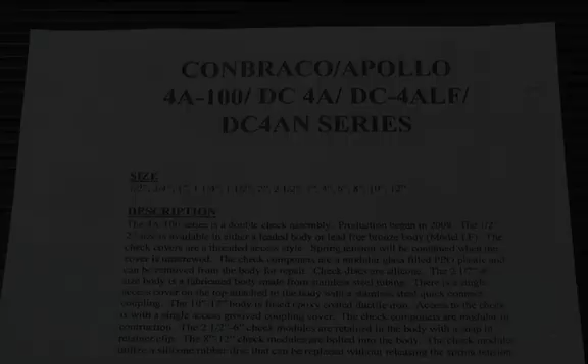The next series we're going to see from Conbraco is the 4A series of backflow prevention assemblies.

Conbraco has had a name adjustment, if you will. You may see the name Conbraco, which is the parent company's name, or you may see the name Apollo used as a model number on the backflow assemblies. So Conbraco, which was Consolidated Brass Company, is the parent company, and Apollo is a model under the Conbraco name. So if you see both names, don't let it confuse you.

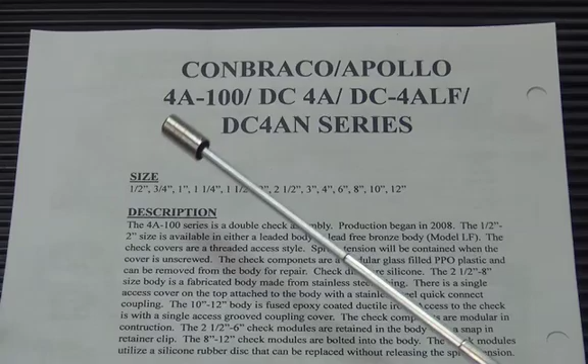The 4A series is their latest generation of assemblies. Like the previous generations, they utilize a two-digit designation. We saw the 40 series, we saw the 4D series, the 4S. Now we're seeing the 4A series, the 100 being double checks, the 4A-200 series being their reduced pressure assemblies, and 4A-500 being the PVB, same as the other model designations.

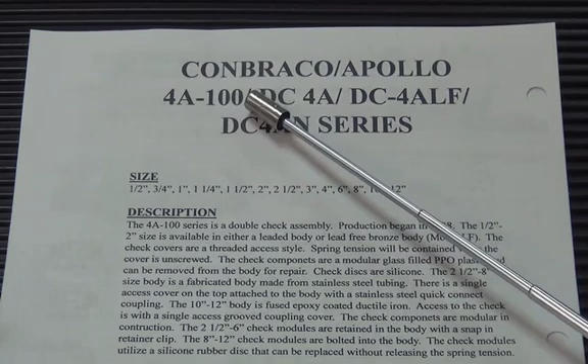The 4A series also has a designation where it utilizes the type of assembly, DC, with the 4A configuration. So you may see 4A-100, or you may see the DC 4A series. They're also producing it in a lead-free version in the small 2-inch and under assemblies. So you may see the 4A-100 series, the DC 4A, or DC 4A LF, as you see here. But they're all within the 4A-100 series of assemblies.

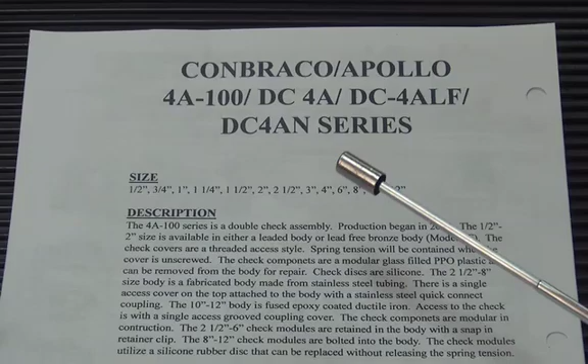They're going to be available in sizes 1/2 inch through 12 inch. The 1/2 through 2 will be the small sizes, available in either a leaded bronze or a lead-free bronze body. The 2.5 through 8 inch will be available in a stainless steel fabricated body, and the 10 and 12 inch will be available in a ductile iron body.

On the small sizes, 1/2 through 2, as I said, they're available in both lead-free and standard leaded bronze. They utilize a top entry configuration, with test cocks pointing up on the top. Screw covers open up the check assemblies and access a modularized check on the inside.

As you can see the breakdown here, here's what the modular check looks like. Here's the check in an exploded view. There's a spring retainer, a spring, a disc holder, the disc retainer screw, and the check seat. And the check seat is sealed into the body with an O-ring. It goes into the body like this.

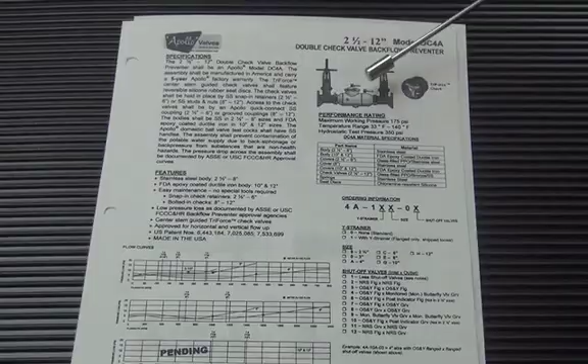On the larger sizes, 2.5 through 8, there will be a stainless steel body, fabricated, meaning that they weld pieces together to assemble the body. The 10 and 12 inch will be a ductile iron body, a standard poured material with a fused epoxy coating. The check modules will be modular in this design, similar to what we've seen in the 4D series.

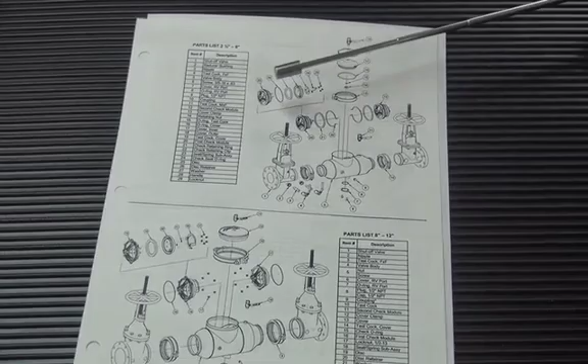They are a TriForce mechanism with a center guided check. Again, they're modular, so the check comes out in its complete working parts. And here's an exploded view of what the module looks like.

The end configurations will have a grooved end, so the gate valves will be a flanged by groove end. They'll also be available in grooved by grooved end if you so desire. But the body itself only comes in a grooved configuration.

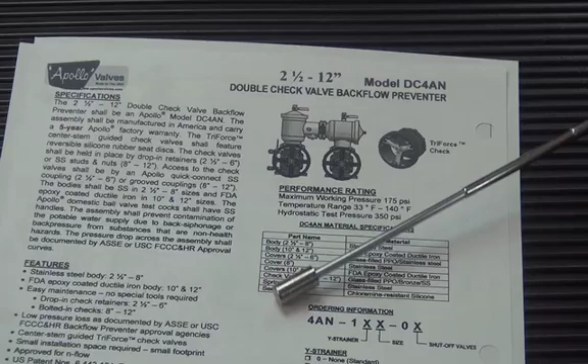They're also making an N pattern configuration, meaning the inlet comes up from the bottom, goes out horizontally, and back down in a vertical configuration. This is available for areas where you need a small footprint of the installation, where you want to install the assembly in a relatively small area.

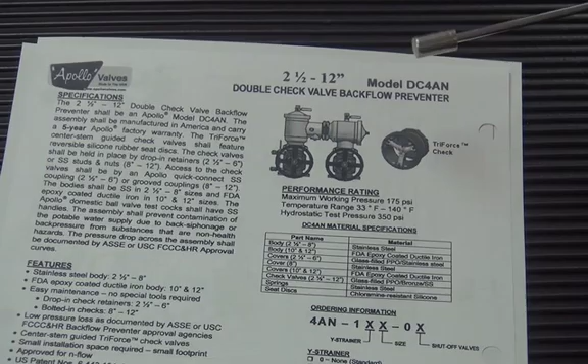Again, 2.5 through 8 will be available in stainless steel, and the 10 and 12 will be available in epoxy coated ductile iron. They will utilize the same check mechanisms as used in the horizontal pattern.

They also have available what are called valve setters. Valve setters for the N pattern configuration make for easy installation orientation, so that when you go to install this in the underground area, you can have L's that have a preset distance between them, so that the center to center matches up with the center of the backflow assembly. So all you do is cut your risers for the up and down between the adapters, and then lay your piping in the ground for an underground installation.

The series comes, as I say, in 2.5 through 12 inch sizes, and let's see what they look like inside.

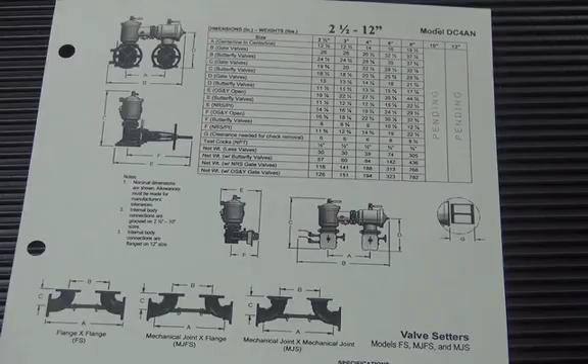The 4A series of double check, meaning the 4A-100 or DC 4A, as you may see both versions of it. This is the small, meaning 2-inch and under, assemblies that they're producing. They are available in either a leaded bronze assembly or lead-free bronze assembly for the main valve and the bypass and test cock units.

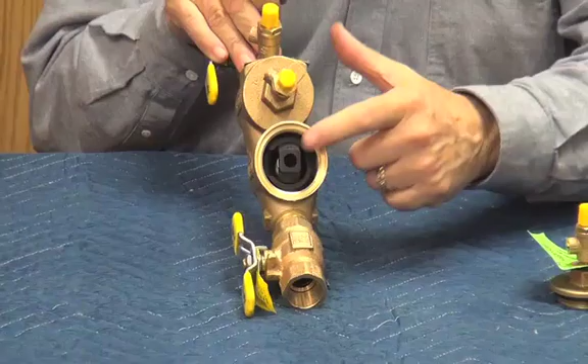Check covers thread on from the top. There is a hex head on the top of the cover for removing it. The spring is contained when you remove the cover, and there is a cover O-ring here. Once you take the cover off, what you will see is a spring retainer, which looks just like this. Here's a larger version of it, what you're looking at inside that check assembly.

For the average repair, you can push in on the spring retainer, rotate it 90 degrees. The spring retainer will come out, check spring, disc holder. The check seat, which is just pressed into the body at this point, can stay in the body for the average repair. The reason is this O-ring that sits inside the body here is sealing that seat inside the check body.

Anytime you do not have to release a spring load on an O-ring, it's not a bad idea. But you can repair it this way, or you can remove the entire check assembly, which is what this looks like, except this being a 2-inch version. Same story, that 90-degree rotation releases the spring tension, which allows the disc holder to come out. And here's where you can see the check seat cast into the plastic.

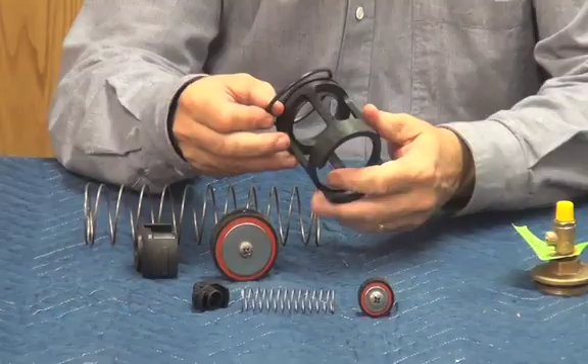There is an O-ring, as you see right here, that seals that O-ring to the body, so it's just pressed into the body and held in by the cover as it pushes on top. So you can either do it this way where the spring stays in there, or remove the check module.

Rebuilding it is a matter of one screw holding the silicone disc into the disc holder, replacing the disc. It's a symmetrical flat disc. Putting it back together is going to be just the reverse.

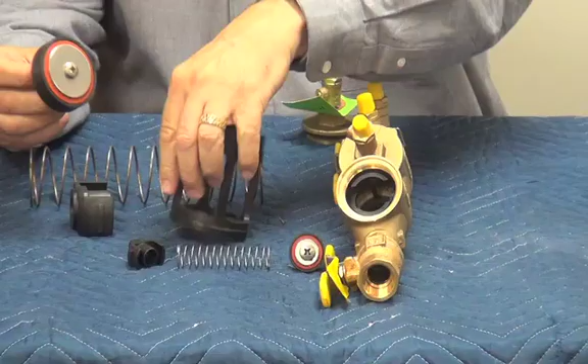Larger check assembly outside the body so you can kind of see it a little easier. It looks like this. Now there's one little thing you want to be aware of when you go to put this back together. This spring retainer, I'll take the spring out for a minute, pushes down here and rotates 90 degrees inside the body like this.

Now it's possible to have it rotate and not sit completely inside the body, because once it rotates 90 degrees, it actually lifts up a very small amount, as you can see right there. So to make sure it's all the way in, it has to rotate in and push up. Remember, the spring force is pushing up on it, so when it does go down, it will have a definite force, and you'll actually hear a clicking sound like that. See, that's where it's improperly applied. See where the spring retainer is slightly down, but rotating at full 90 degrees, it'll pop up just that little 1/8 of an inch, and you'll hear that clicking sound.

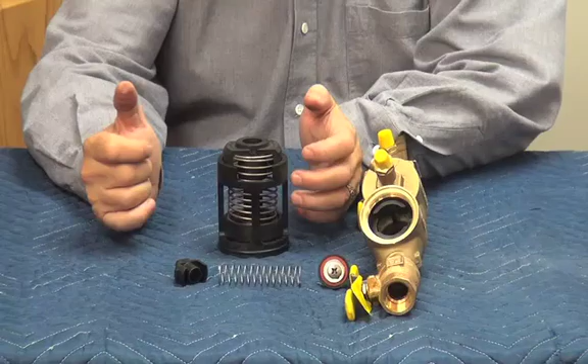Very, very important that that be in this position, because if it's like this, you're going to have some issues with the flow characteristics of the body. So the spring retainer must be in its full opening condition like that, so that it's all the way up. Listening for the clicking sound is a good idea.

Like all O-rings, it has to be properly lubricated. Yes, Conbraco provides a little pillow of grease for this. Proper application of grease is you put it on your fingers, wipe it all the way around the O-ring, and then place it on the check module. Don't put the O-ring on there and then wipe the grease on here, because that won't lubricate the O-ring properly. Proper lubrication of an O-ring, as we've said many times, is in your fingers, rotate all the way around 360 degrees so that it's lubricated properly all the way around.

If you did not remove the check assembly from the body, reassembling is going to look like this. Same story, we have to be very careful to make sure we have our spring retainer and want to hear that clicking sound as it pops into that area. The cover is also sealed by an O-ring, so we want to make sure the O-ring cover is properly lubricated also. Reassemble and tighten the covers back on.

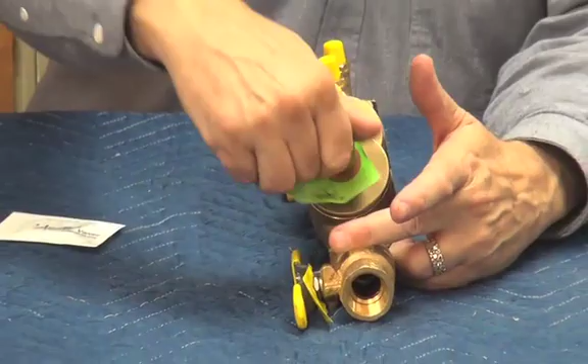Those are the check modules of the 4A100 series, 1/2 through 2 inch. The 4A series in the double check, meaning 4A-100, in the large sizes 2.5 through 12.

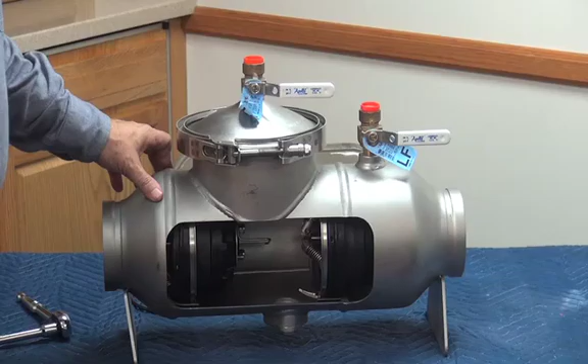The 2.5 through 8 is going to be a stainless steel body like we see here, but it's a fabricated body. Fabricated meaning we have pieces of stainless steel that they extrude into the shape and weld the pieces together to fabricate or construct the body. So by having a few pieces that are welded together, by the nature of welding, there's slight dimension changes that could happen along the weld.

You could have approximately a 1/16 to an 1/8 of an inch difference on a weld. So the end-to-end dimension, depending on how many welds are on the body and your size, could be off by that small dimension. So if you ever have to replace the body or you're putting it into an existing body, it's very important to check that end-to-end dimension.

On the 10 and 12 inch, it is a poured ductile iron material that's epoxy coated. And since it's a poured body, you'll have a standard dimension on the 10 and 12.

They're utilizing something new, this clamp that you see on the top, a quick connect clamp to have access to the check modules underneath. By utilizing a small 1/2 inch deep socket, it allows you to come in here and loosen this clamp. Once the clamp is loosened, you can compress it inward, sliding outward like this, and the clamp will come off in one piece.

In other words, this little hinge comes over here, so that holds on to there, and that's how that clamp operates from the top. It's sealed by an O-ring on the top.

The cover comes off next. And underneath the cover, you'll see the O-ring slot, and this is where the O-ring seals on that body right there.

The test cock on this is our number 3 test cock. Test cock 1 and 2 are going to be mounted on the inlet gate valve. Test cock 3 will be on the cover, and test cock 4 will be here. Test cock 4, you can see, is just a standard male thread going into the body. But test cock 3 has a bulkhead fitting that we've seen on some of the other versions inside the cover. So it's not just a standard test cock from that standpoint, but it operates on a bulkhead type configuration.

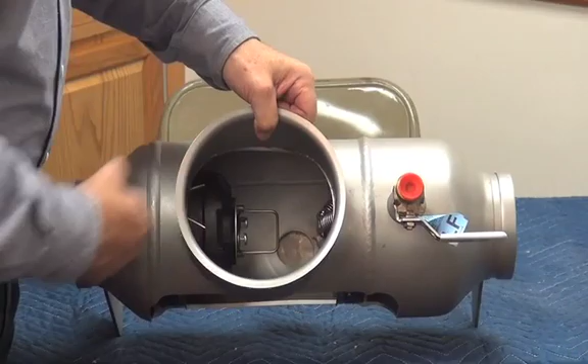To remove the checks, we're going to have to remove this clamp right here. And you can see the 2 little fingers protruding through the top. By entering and squeezing those, the clamp comes out from the top like this.

Next will come out a spacer, which is in there to add additional strength, and that's what holds the check assembly, with a small handle on the back side, allowing the check assembly to come out in one piece like this. So what you're seeing inside the body is this guide here, the spacer for strength, and the clamp that hooks into the body like that. So that's the check mechanism.

Clamp, spacer, and check assembly. So here's what the check assembly, the check module, looks like outside the body. As we saw in the body, it looked like this, as I said. The little handle on the back is to grip it to get it out of the body.

It's sealed by an O-ring, and here's where the O-ring sits inside that check module. That's what actually seals that check into the body.

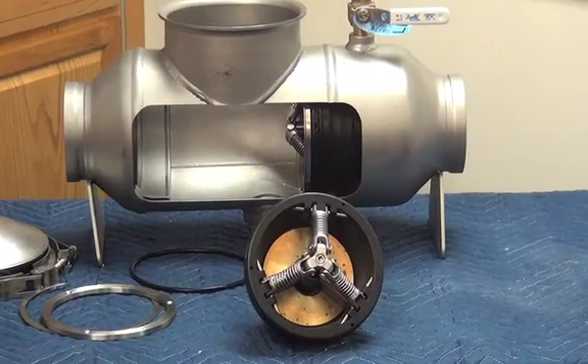Once we have the check assembly out, you'll notice here's that tri-force spring, the 3 different springs that you'll see on the check mechanism. The springs are not field replaceable, and the factory won't even sell them to you because they don't want you taking the springs apart for the average repair. For the average repair, those don't have to be touched.

For the average repair, all you're going to do is on the back side, there'll be 4 little nuts. 2 of them will be holding this little handle. As you can see, I'm missing 2 of the nuts. Retainer washer, and then a disc holder.

Disc holder comes off, silicone rubber disc comes out, it's a symmetrical round disc. The check seat is right here, and you do not have to disassemble the check module any farther than that for the average repair. So for the average repair, all you're going to do is replace the disc, just the reverse of what we saw. Get the check assembly back together.

Retainer plate, 4 bolts, 2 of them holding down the handle. We want to take the time to tighten the 4 bolts evenly.

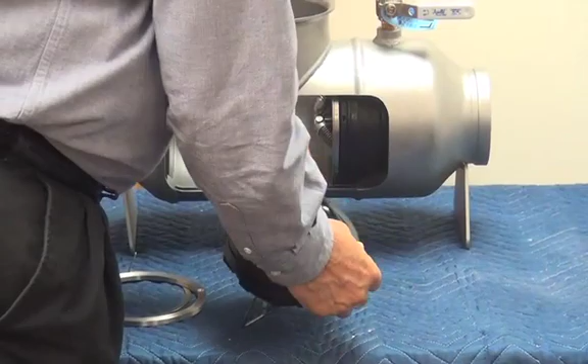We want to properly lubricate our O-ring, again greasing your fingers, rotating the grease all the way around 360 degrees, inserting the grease around the check assembly, ready for reassembly.

Before we put the checks back into the body, you do want to inspect the body, make sure there's no signs of debris or anything inside the body. Since it's a stainless steel body, we should not have any other issues other than making sure there's no dirt inside there.

Reassembling of the first check and second check, this being the first check. And obviously I didn't take the second check out, but to get the second check out, the first check has to come out first, and vice versa.

So what we're going to do is install it this way. First check going into the body.

Now we are compressing this, squeezing this O-ring through this retainer right there. So it's important that we get that check assembly all the way back in.

This spacer is there for added strength that holds it into the body. Yes, I'm going from the side, but you can see right here where it holds that into the body, and we still see the small little recess here where that clamp is going to go right there.

So the clamp is a spring clip that you see like this. So we're going to insert it in from the top, squeeze the clamp from the center, and this clamp will sit right into the slot right here and right here, as you can see from the bottom.

So the check assembly is firmly held in by the clamp with the support bracket. Here's the O-ring that seals the check into the body. See the second check in like that.

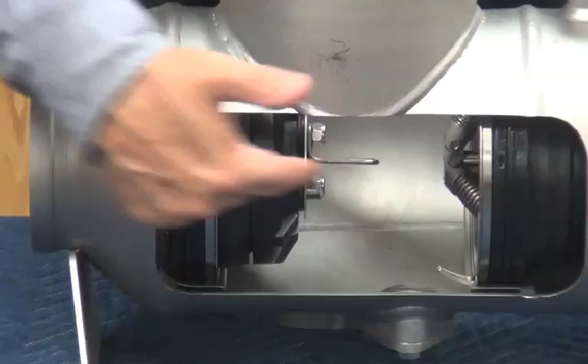Now you can see the check assemblies are in. You can see our second check and first check. You can see a close-up now of what that spacer and that ring looks like that holds that check into the body that we just took out.

The bolts tightened on the back side. I'm sure missing 2 of them here because it's a demo. I want you to see the clip from the top.

Now you can see what it looks like up there, those 2 ears. And that's what you need to see on that clip that's sprung in there, and that check needs to be in tight. Once we've got the second check and first check in, now we have to take a look at the cover.

This is what the cover looks like. One thing I forgot to mention is that the cover actually has 2 screwdriver slots on it. You can see right here.

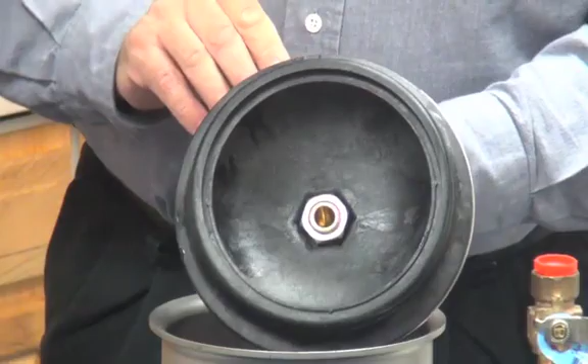So that when the cover is on, you are able to get a screwdriver to remove the cover easily when you're taking it apart. So those two slots that are sitting, one right here and one on the opposite side, can be seen from the side for when you take it apart.

Putting it back on, the cover is sealed by an O-ring. The O-ring, like all O-rings, has to be properly lubricated. Lubricate your hands, pull it 360 degrees around, then put the O-ring on the cover. Don't put the O-ring on first and then try to lubricate it.

Second issue about the cover to notice is that the test cock is actually mounted by a bulkhead fitting. You'll notice test cock number 4 is a standard threaded test cock, but this one, because of the cover, has a bulkhead fitting attachment that holds it to there.

So once we have the O-ring lubricated, O-ring on, now it's time to place the cover on. Get the cover centered, go ahead and push down.

Now for the quick connect clamp. You saw as we took this apart, now we have to put it back together. So the quick connect clamp goes around there. You'll notice on the body that there is a V shape.

In other words, the body rolls out this way and the cover rolls down that way, and there's a corresponding valley inside the clamp right here. So it's designed to go inside that little valley, and the cover goes over the top just like this.

Now tightening this cover. It's very important that we have it properly tightened. A 1/2 inch deep socket is needed. If you have a speed wrench instead of a ratchet, that goes a lot faster.

But I do want to show how it's to be tightened, because I want to get it so that it's snug. See, it's still loose here.

The 4A200 series is going to be the reduced pressure principle backflow prevention assemblies from Conbraco. Conbraco is the parent company. They're also using the name Apollo as a brand model of this particular type of backflow prevention assembly. So you might see Conbraco, which is the parent company, you might see Apollo on the valve, or both.

And the 4A-200 series, which is the series of the assembly, may also be designated as the RP4A, and the LF in the small versions for lead-free. This comes available in sizes 1/2 inch through 12 inch.

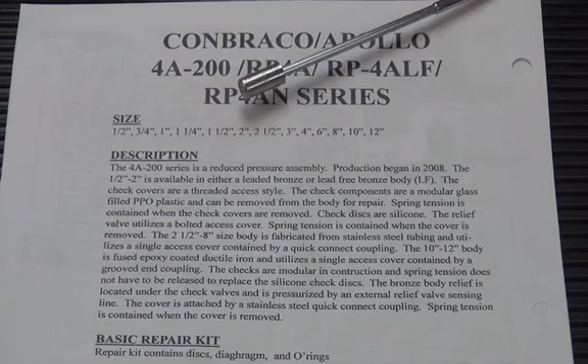The 1/2 inch through 2 are going to be a bronze or a lead-free bronze body. The 2.5 through 8 inch are going to be a fabricated stainless steel body, and the 10 and 12 inch are going to be a ductile iron body that is fused epoxy coated.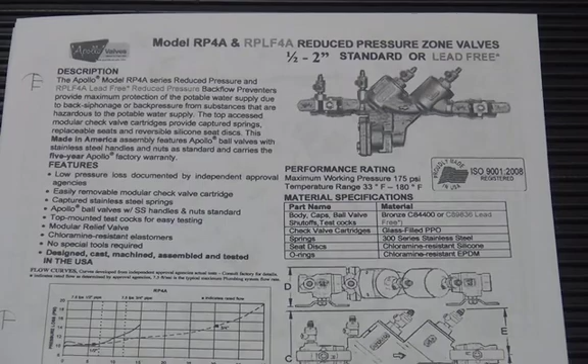The 1/2 through 2, as I said, is available in either a standard leaded bronze or a lead-free bronze. Two access covers for each check from the top, screw in from the top, hex head cover, relief valve cover on the bottom, the relief valve below here, inlet outlet shutoffs as we see here.

They use a modularized check assembly for the checks, as we saw in the 4A100 double check series. Here's what the check module looks like outside the body, with a spring retainer, our spring, our disc holder, our check disc retainer washer, disc washer bolt, and our check seat and seat O-ring.

This check module mounts inside the body. It's pushed in there. It is not held in by any type of a fastener, and the cover holds it on from the top. On the bottom where the relief valve is, we have a relief valve cover that comes off.

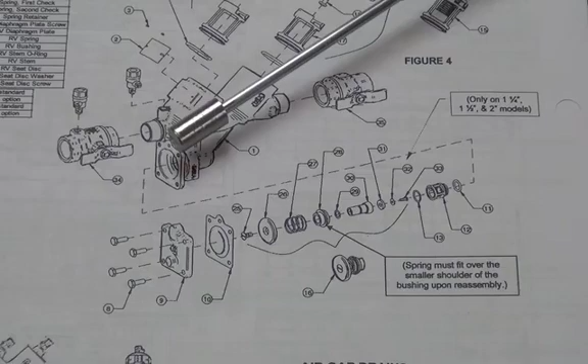Once the cover comes off, we have our relief valve diaphragm, which is loose. Our relief valve stem assembly is underneath that diaphragm, which comes out in one piece. Disassembling one screw on the back side here allows you to remove the relief valve disc.

Removing the screw on this side releases the relief valve spring tension from the spring retainer washer, and our guide and our stem, which has an O-ring mounted in the center, and our relief valve seat, our disc. The relief valve seat pushes into the body and is sealed by an O-ring inside the body itself.

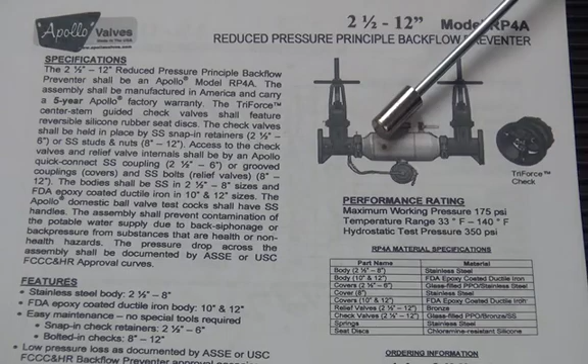The large size is 2.5 through 12. We're going to see two different body materials. In the 2.5 through 8 inch, we're going to see a stainless steel body with a fabricated steel construction, meaning pieces of the tubing are welded together to fabricate a body.

The 10 through 12 inch body is going to be a ductile iron body that's fused epoxy coated. The relief valve is mounted underneath the body, with a relief valve sensing line coming off the inlet shut-off onto the relief valve cover in the center. The relief valve assembly is mounted underneath, and it does not have to be removed from the body for the average repair. It just has to have the cover and the hose removed.

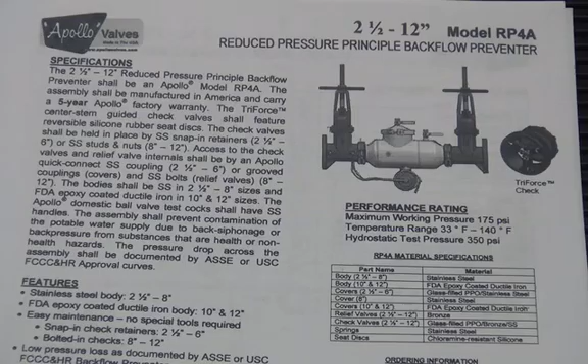The breakdown shows a modularized check assembly. The 2.5 through 6 inch will have checks held in by small retainer clips, spring clips, as we saw in the 4A100 series. On the larger sizes, the check assemblies are actually bolted into the body, and that bolt configuration, instead of a clamp or a clip, is what holds it into the body.

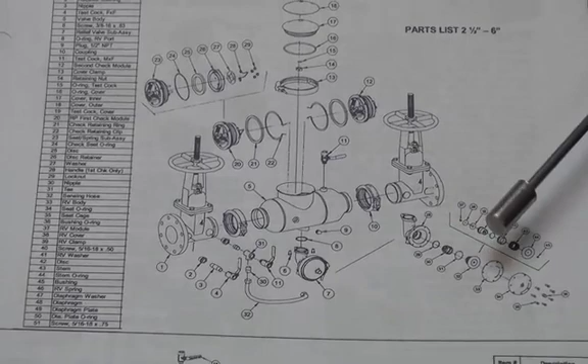There are 3 different sizes of relief valves: one that fits 2.5 through 6, one for the 8, and a third one that fits 10 through 12. The 2.5 through 6 has a cover that comes off, a separate O-ring, and a relief valve stem which can be exploded out, plus a relief valve seat which presses into the body, similar to what we saw in the 2-inch design.

They also produce an N configuration for the reduced pressure assembly in the 4A200 series, and also a configuration where the water pressure will come from the bottom, go horizontal, and go in a vertical orientation. So whether it's up and down or up and over, because of the body having a groove coupling in the middle, the second check can be rotated to give different orientations.

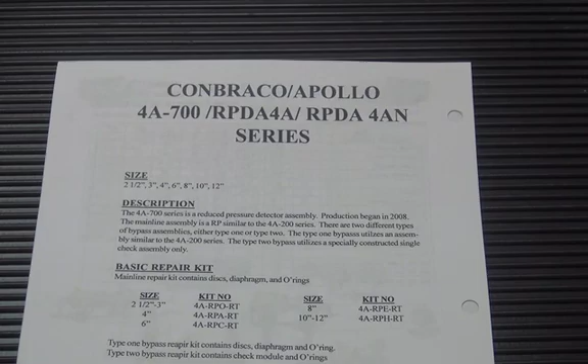They also produce a reduced pressure detector assembly version of the 4A200 called the 4A700 series, or the RPDA 4A series, also an N pattern configuration as we see from the model number. The horizontal version, the RPDA 4A 700 series, has a horizontal piping configuration. The check bodies are grooved in, so the gate valves will be grooved by flange, as we saw in the double check version. They also have a Type 1 and a Type 2 bypass assembly available.

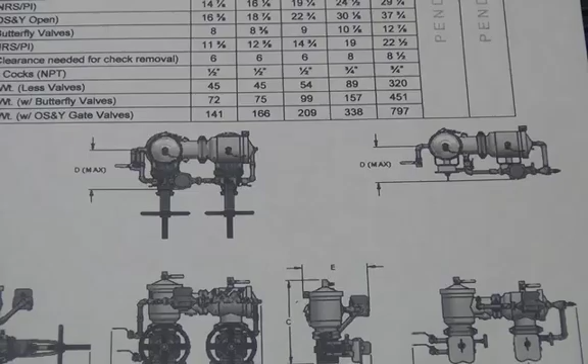As we discussed in the 4A100 series, the Type 1 bypass has a backflow assembly of equal protection, where the RP main line has a bypass RP. Type 2 is where the bypass has only a check valve that goes around the second check. So Type 1 or Type 2 bypasses are available. It's also available in an N configuration with the double RP detector assembly, both Type 1 and Type 2.

Let's take a look and see what they look like inside. The 4A200 series, or RP4A series, there's a small 3/4 inch version, and it comes in either a leaded or a lead-free bronze assembly. Again, repair parts will be the same for either version. Here's a cutaway version showing the inside.

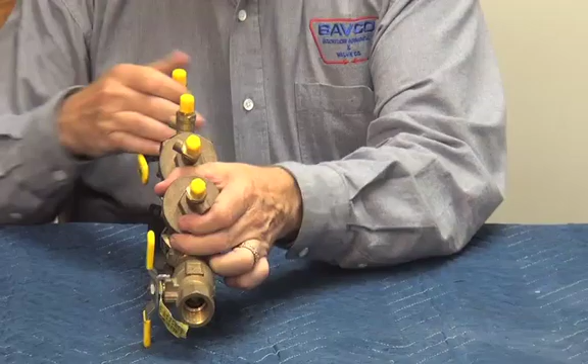You'll see what the checks look like in the middle, with the relief valve underneath. These are modular checks, meaning when I have the hex cover on top, I can go ahead and remove my cover. The cover comes off, and what I'll be exposed to is a check module. What you're actually looking at right here is a spring retainer. For the average repair, you don't have to remove that check module.

This is what a 2-inch check module looks like, sitting in there like this. But you are able to just take the spring retainer, rotate it 90 degrees, release the spring retention, and the spring retainer, spring, and disc holder come out in one piece. One screw holds the disc into the disc holder. This utilizes a silicone rubber, as you see there.

Here's what the check mechanism looks like in a large version, so you can see it apart, because you can remove the check assembly. The check assembly is sealed into the body by an O-ring, right here, where it seals in the body. So for the average repair, by just taking this apart, you don't upset the load on this O-ring. But if you have to remove the seat for some reason, then that O-ring can be easily replaced.

Spring retention is a little easier with the larger one: spring retainer, spring, disc holder, and seat. So that's the check mechanisms. If you're rebuilding the check outside the body, it's going to be just the reverse.

Replacing one screw to replace the check disc in the disc holder. Now the problem with the check is that you have this retainer. If you'll notice, the retainer has these little clips on the side, which are meant to go down through this recess and rotate 90 degrees. But you'll notice once it rotates 90 degrees, it can move almost a good 1/8 to 1/4 of an inch on that 2-inch assembly. So you want to make sure that's in the right spot.

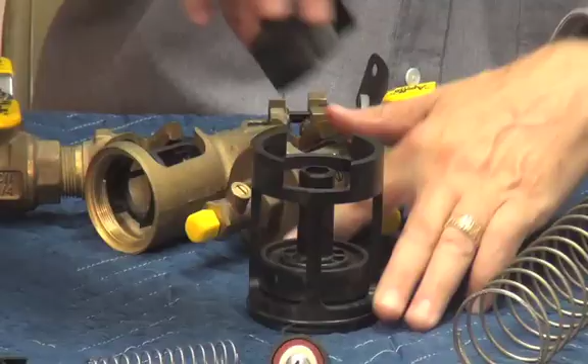Once you have the spring loaded, make sure the spring is centered around the disc holder. It is possible to put the disc holder off to one side like this, and if you do that, it causes a tipping action, which causes a lot of issues with spring load. So make sure that your spring is symmetrical in the center of the disc holder.

Spring retainer from the top, pushing down. You want to rotate that spring retainer 90 degrees, but you want to listen for a clicking sound. Listen to this. That click tells you, and you saw how it popped up there at the end, shows you that it's in the right spot. Right there is incorrect. That is correct. It will actually raise up almost a 1/4 of an inch above there on the 2-inch size.

If you're rebuilding the checks and not removing the seat from the body, you can replace the disc holder into the disc holder. Spring goes in next. Your spring retainer goes in here. You want to do that 90-degree rotation. You want to hear that clicking sound. Same thing, you want to make sure it gives that click, just like that.

Cover O-ring. Make sure the O-ring is properly lubricated on the seat if it's replaced, and the cover. Remember, proper lubrication, as we've said many times, as the O-ring comes off. Grease in your fingers, push the grease all the way around 360 degrees. Then place the O-ring on the cover. Cover goes over the assemblies like that, over the body, like that. And that's our check mechanisms in the 4200 series.

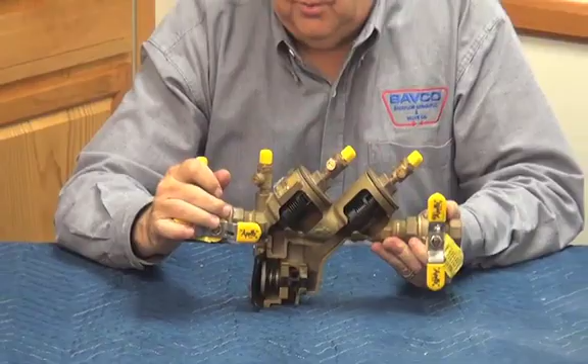Let's talk about the relief valve now. Here's what it looks like without the cutaway side, and here is a cutaway side, so you can see what looks inside there. You'll notice there's a relief valve cover, our diaphragm, our relief valve stem, our relief valve seat on the back. So we're going to remove our cover bolts off of this.

Once we remove our cover bolts off, what we're going to see is a diaphragm. This is a 2-inch diaphragm. This is a 3/4 assembly. But once you take the cover off, it exposes the diaphragm. The diaphragm comes off loose, and what you'll next see is this stem assembly right here. By grabbing the spring retainer, it'll come out in one piece just like that.

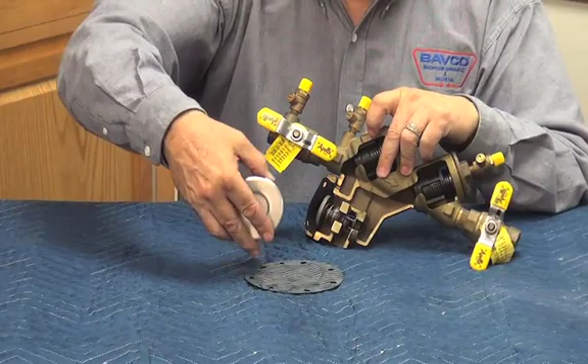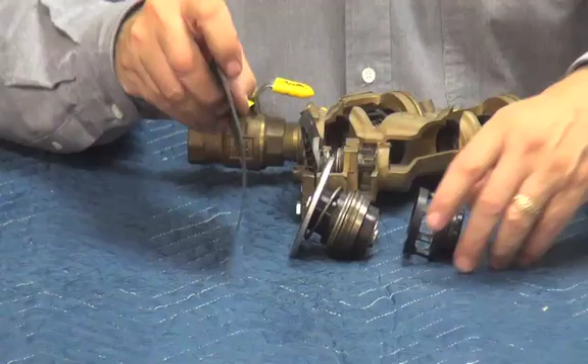The relief valve seat pushes into the body. It is not held by any kind of fastener. There's an O-ring seal right here, so it's a friction fit that sits into the body, and the relief valve stem goes on top of it like this, and your diaphragm sits on top like that. So that's what you're looking at inside that body: the diaphragm, stem assembly, and seat, just like that. The 2-inch is a little bigger to see than it is on the small 3/4.

So let's go ahead and take that stem apart so we can see what it looks like. Again, the seat stays inside the body for the average repair. It is held in, sealed by an O-ring. Stem moves back and forth like this, as you can see. The movement of the diaphragm compresses there.

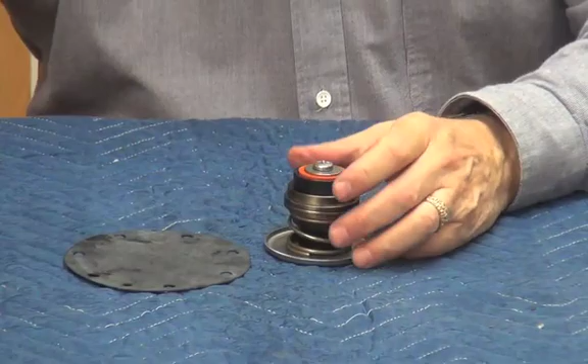So what we're going to need is a screwdriver. One screw removes the relief valve disc and disc retainer washer. Turning it over allows me to remove the spring tension from the stem. Phillips head screw comes off next. There will be spring tension from the relief valve underneath.

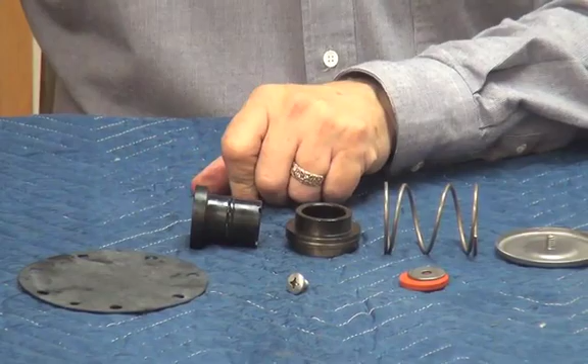And relief valve spring retainer, spring, our relief valve stem. This is our relief valve guide, and a very important O-ring that you see right here in the center of that stem. That O-ring is one of the critical parts of that relief valve. And as you can see, it's in the middle of that guide.

So as this stem travels back and forth, this O-ring sits in the center, and it has to seal as it moves back and forth. It's called a dynamic O-ring, an O-ring that must seal with movement. Very, very critical that this type of O-ring be properly lubricated. Again, proper lubrication is wiping all the way around in a 360-degree fashion, putting the new O-ring on.

Want to work it through the guide to make sure it moves easily. That should move literally just that easy, back and forth. If you have any kind of problem with that O-ring moving back and forth, the rubbers that we're utilizing on this design...

are resistant to chloramine attacks. So fortunately, we should not have any interface where this O-ring swells like we have on some of the other black rubbers that are out in the market. So you can tell that if that O-ring was swollen for any reason, it would resist movement across that guide. And if it resisted movement, that would affect our relief valve opening point.

Reassembly is going to be the reverse. I'm going to go ahead and, once we have our spring retention on the cover, the relief valve disc goes on the other side, relief valve disc retainer, our relief valve disc retaining screw.

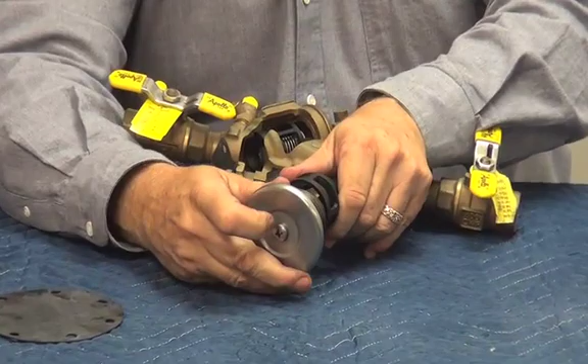So it's kind of a blind assembly. We want to make sure we hit it straight center because we want to make sure that stem moves easily through there. So as you go to put the stem back in, gently push it until you get into the slot, and you can see how it sits like that.

And then once it's in the body, now we have our relief valve diaphragm. Make sure we line up our high pressure sensing line, which is attached up here in the body, right over here, with that extra hole that we see in the diaphragm, lining it up.

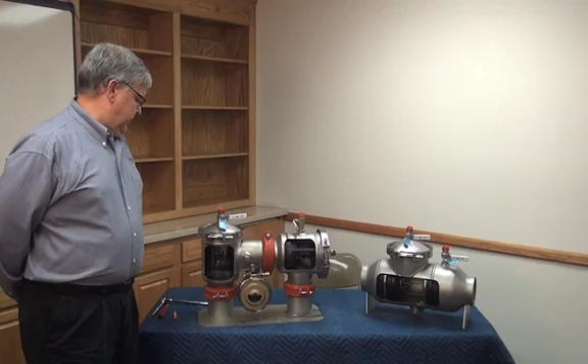Relief valve cover, and that's our 4A200 series in the small sizes, meaning 1/2 through 2-inch. In our 4A200 series in the large, meaning 2.5 through 12, the 2.5 through 8-inch are going to be a fabricated stainless steel body.

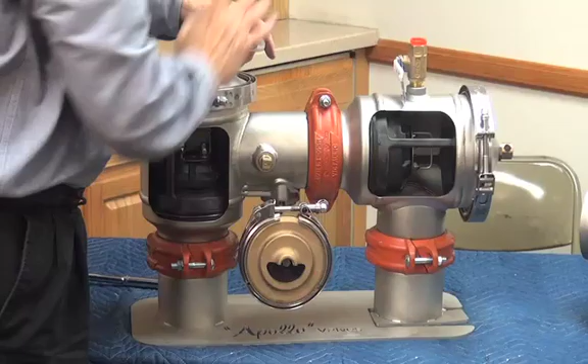The one-piece horizontal body over here you see where it's a fabricated body where pieces are welded together. They also have the end pattern configuration for the up and down configuration, with a groove coupling in the middle so that we can rotate that second check 90 degrees, 180 degrees, whatever we had to rotate it to get our check in an up and down, our flow in an up and down configuration.

We're utilizing quick connect clamps again on both checks on the end pattern and on the relief valve. Single access cover on the horizontal pattern as you see here.

I'm going to take the end pattern apart first so we can see the relief valve, and then we're going to talk about the horizontal pattern because the mounting of the check mechanisms is different.

You'll notice in the end pattern there's this little retainer in here that I can move easily on the side holding our checks, versus the horizontal version. What we see is the clip with the spacer washer that we saw in the 4A100 series.

So let's go ahead and take the end pattern apart. Start by removing the clamp. Again, a 1/2-inch deep socket is needed to remove our clamp, which allows you to loosen that up. Once you have it loose, squeezing the clamp will allow the clamp to come off in one piece.

So the clamp has a little T-bar on the back that slides over here, and that's how it sits inside the body. Once I have the clamp off, there are 2 screwdriver slots that allow a screwdriver to come in so you can move it up and easily remove the cover, which is sealed by an O-ring that you see right here.

On the cover, you'll notice that the test cock is a bulkhead fitting mount. If you look from the top where the stainless is, look on the bottom, you see the lock nut, as opposed to the standard threaded type test cock that you see over here on number 4.

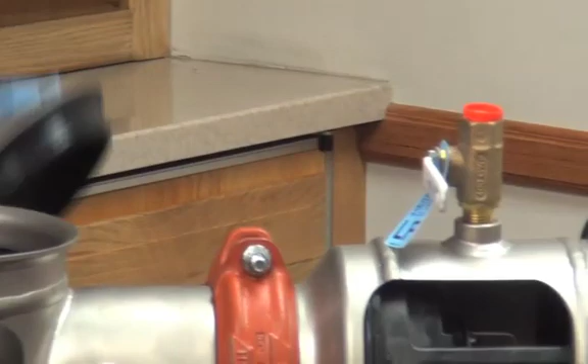Once we have the cover off, what we're exposed to is this plastic piece I was showing, which is a spacer. And the spacer comes out in one piece. So the spacer sits there with the cover pushing down on it, and that's what holds the check mechanism into the body.

The check is sealed by an O-ring and has a handle on the back side so it can come out from the top. Here's where you can see that O-ring. The check assembly comes out in one piece, using a tri-force spring like the 3 loads we saw on the 4A100 series. The check assembly is sealed by an O-ring into the body.

To rebuild the check assembly on the back side, we're going to see 4 small nuts. Removing those nuts, the handle comes off. The handle is held underneath those nuts like this. Our washer and disc holder come off in one piece.

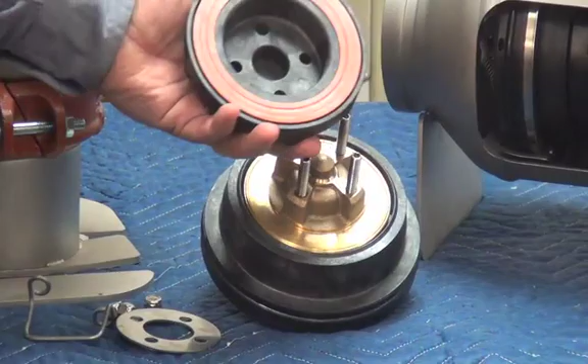A silicone rubber disc is utilized on the check mechanism, and it comes out as a flat symmetrical disc. Replacing the rubber disc is this new one. The check mechanism does not have to be adjusted or changed in any way.

Springs are not field replaceable. If you need anything more than just the basic rubber parts for this, you will have to buy the entire check module. Reassembling is going to be just the reverse.

New rubber disc, disc holder, our retainer plate, our little handle. We're going to go ahead and put our nuts on the back side of that check assembly. I want to make sure we tighten it evenly as we go, so we don't put any undue forces on the back side of that plastic, causing any kind of tension.

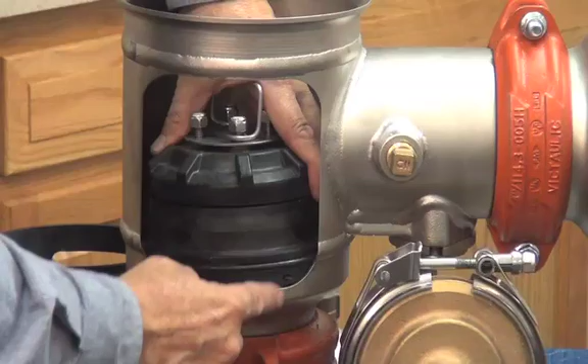Replace the O-ring with proper lubrication. As we've said many times, the O-ring has to be greased 360 degrees all the way around. Assembling from the top, the check assembly goes in. Here's where you can see that O-ring seal. As I push down, you can see from the side where that O-ring seals, right inside that body. Now once I have that check mechanism in, the spacer goes in from the top, which allows me to take my cover.

Pushing on the top here, making sure I've got it all the way down across here so that I know I've got force on that spacer. Now you can see how it's actually very hard to move when the cover is not on.

The clamp again comes off like this. The T-bar allows it to catch in that hook that you see right here. And the clamp will connect just like that. Get a 1/2 inch deep socket, which allows us to come in here and tighten that up. The second check has a small variation on this because we're at that angle.

When we go to remove the clamp and remove the cover, you can see how it's very easy - gravity making everything just kind of fall out. The check assembly is held the same way with the O-ring. But the problem is getting this spacer back in, which you see falls, and then I'm going to try to get the cover at that angle.

The easiest way to do that is to go ahead and put the retainer into the cover. You notice the slot that sits in like that. And by holding it in the slot like that, it does make it a little easier to get into the body, making sure I've got it in straight. Now you can see from the side how that works.

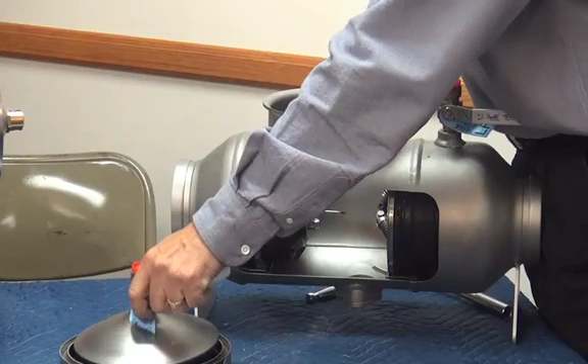Same type of check mechanism we just saw over here, but what's different is this little spring clip that you'll see right here. I just push it to the side so you can see. From the top, it squeezes in like this, so you have to actually squeeze it and then pull it out like this. It'll be mounted up on the top portion, and taking the two little clamps, squeezing it allows you to pull the clamp out in one piece from the top.

Once I have the clamp off, you'll see this little stainless piece here. It's a spacer that comes out, and it's there for added strength of the check assembly, the body. And then the check has that same handle that we saw, which allows you to pull the first check out.

The check comes out in one piece like that. Same bolts on the back side for changing the disc. The difference is the mounting mechanism, and that's where we have this spacer plate and this retainer clamp.

Here's what it looks like outside the body. So by squeezing it like this, getting it on, releasing it, that's what it will sit like inside the body. Same repair procedure: remove the 4 bolts, allows you to change the disc holder.

We've already done that. Let's go ahead and mount the horizontal check back into the body. So we're going from the top, mounting our check assembly in like this, using our handle to rotate the check.

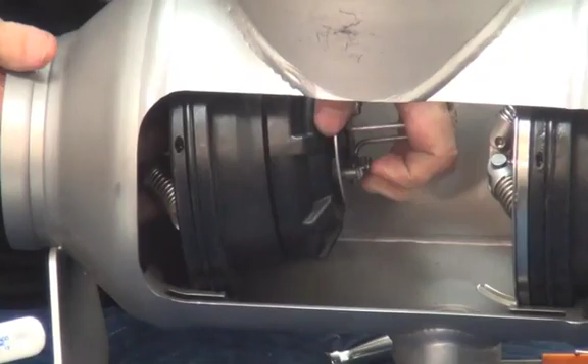Now here's where it's very important that this O-ring gets pushed all the way back into that body. In other words, when this check assembly gets into position, we want to make sure that O-ring pushes all the way back so that we have a nice spot here and a nice spot for the retainer.

Because remember, this spacer has to sit right there, and then after it we have to have this. So we want to make sure we've got all our space in here so that the check assembly is fully pushed back into the body.

Next, our little spacer, which is there for strength. And now for the spring clip. This is what it looks like unsprung, but that's what I'm going to do, is squeeze it like this, push it into the body, get it into the clip.

So by pushing it in from the top, getting it around on the bottom, like that, around the sides, and the spring clip will go in just like that.

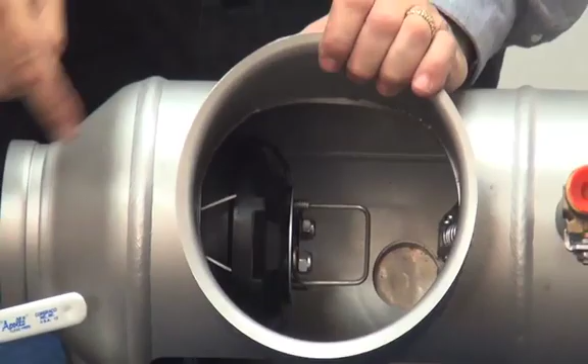So seeing the clip from the top, you can see the 2 points here where it springs to hold that together, seeing how it sits inside the body here. Next, our cover goes back on.

Proper lubrication of the O-ring. The O-ring has to be lubricated. Take it off through your fingers, just like we've said a bunch of times.

Now for the quick connect clamp. You saw as we took this apart, now we have to put it back together. So the quick connect clamp goes around there. You'll notice on the body that there is a V shape.

In other words, the body rolls out this way and the cover rolls down that way, and there's a corresponding valley inside the clamp right here. So it's designed to go inside that little valley, and the cover goes over the top just like this.

Now tightening this cover, it's very important that we have it properly tightened. A 1/2 inch deep socket is needed. If you have a speed wrench instead of a ratchet, that goes a lot faster.

But I do want to show how it's to be tightened, because I want to get it so that it's snug. See, it's still loose here.

I want to get it so that it's snug first, because what seals this cover is not the tightness on this clamp, but the O-ring. So once I have that cover snug like this, now it just takes a couple of points beyond that.

In other words, this cover is not sealed by the tightness of the torque of this bolt, but by the O-ring. The V shape of that clamp holds that body and cover down and holds that in place. So this has to be properly tightened, but not over tightened. Over tightening can actually torque the body and cause some issues with it.

So this is our horizontal oriented body. Again, this is a double check body. As an RP, the relief valve will be mounted under here, but you see the idea. So the checks that we've seen, this and the cover on.

Now we want to take a look at the end pattern, which has a little bit different configuration. And again, same thing — that clamp that we concerned ourselves with the cover, the same story happens on this one.

So there are 3 clamps: the one on the first check, the relief valve, and of course the second check. The tightness of this clamp is important, making sure we have it tight enough, but we don't over tighten it so we don't torque anything.

The difference on the end pattern is that the check assemblies are not held in by that retainer ring, but they're held in by that plastic spacer that holds them in place.

The 10 through 12 inch body in the end pattern also will be ductile iron, fused epoxy coated, similar construction to what we see here. We won't have the retainer ring, we'll have the spacer mechanism that holds those together. The difference is that the body itself is ductile iron and fused epoxy coated.

The groove coupling in the middle allows for the orientation to change, so the second check can be in a straight up pattern, giving us vertical orientation. So that's the horizontal checks.

Let's go ahead and take a look at the relief valve now. The relief valve is mounted underneath the check body. This is our end pattern configuration. The relief valve mounting on the horizontal configuration would be mounted here, this being a double check body, but you can see the flange there where that relief valve would mount underneath.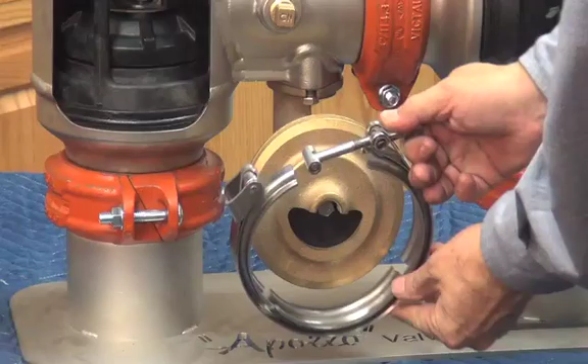So first I have to remove my high pressure sensing line. We have another of our quick connect clamps, so we have to get our 1/2 inch deep socket in here and loosen that up. That allows us to remove the clamp, just like we've seen on the check mechanism several times now. The relief valve cover is going to come off in one piece like this.

This is obviously a cutaway, so you can see the hole in the center there. Once we have the cover off, what we're going to see is our diaphragm, and our diaphragm is connected to our relief valve stem. So by grabbing our diaphragm, we're going to pull the stem out in one piece like this.

The relief valve seat sits inside the body. It's not held in by any fasteners, but it's sealed by an O-ring on the back side like this, and does not have to be removed for the average repair unless the relief valve seat is damaged in one way or another. Repair of the relief valve stem.

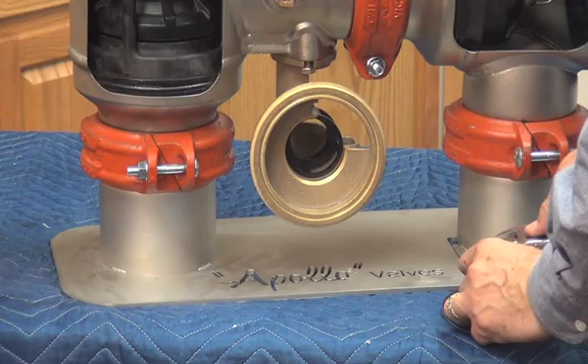We have a bolt on this side which holds our relief valve disc into the disc holder. Disc retainer, washer, disc, allows us to turn it over.

Now on the back side we have a bolt that holds our relief valve spring tension, so we have to be careful as we go to remove this bolt. There will be spring tension underneath from the cover, on the diaphragm plate, so that as we release this bolt...

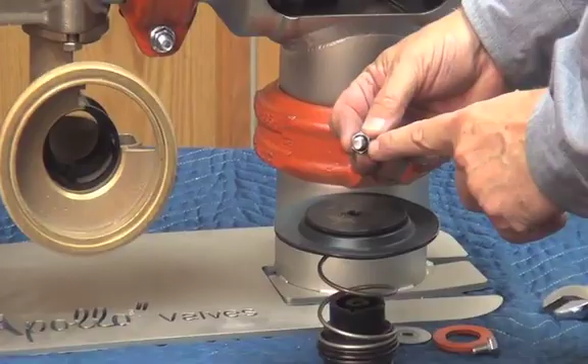Spring tension comes underneath. Now this bolt is important because there's an O-ring on the head of that bolt, which is very important for the sealing of this. So there's our bolt, here's our upper diaphragm plate.

Our diaphragm, our lower diaphragm plate, our relief valve spring, our guide, and our stem assembly with the O-ring in the center, relief valve disc, disc retainer, washer, and that. So that's the entire stem assembly.

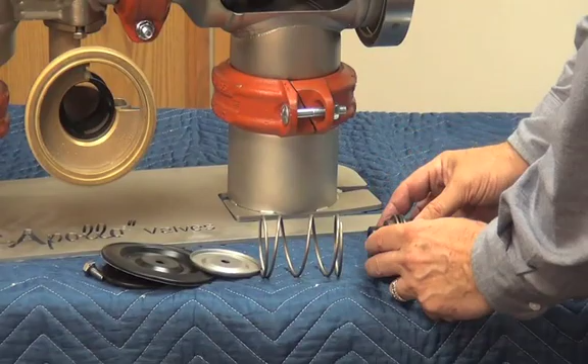Just like on the smaller series, actually just like all of the Conbraco series going all the way back to the 40 series, they utilize this O-ring stem design, where the O-ring mounted in the center of a stem slides across a stationary spacer. The spacer, as you can see right here, with the O-ring, is sealed inside the body. So this spacer mounts in there, where the stem moves back and forth like this.

So anyway, that's just a quick look at the parts. Let's go ahead and put it back together. Reassembling is going to be just the reverse. We're going to mount our guide with our spacer.

Our relief valve diaphragm is directional. You'll notice that the diaphragm on one side has a rolled piece, like an O-ring, and the other side is flat. If you'll notice on the body, we have a recess right here that corresponds with the recess on the O-ring.

What they have done is put an O-ring mounted into the middle of that relief valve diaphragm. In other words, the cover is flat here, but the recess for that sits like this. So this diaphragm is directional, it must go where the roll is back towards the body. If we do it the other way, we're going to have a problem.

So to reassemble, we're going to put it this way, so the roll goes into the body, diaphragm plates, now we're going to catch that, and we want to make sure we have our assembly bolt tight.

Relief valve disc, disc retainer, disc retainer bolt. Again, make sure we have that properly tightened up.

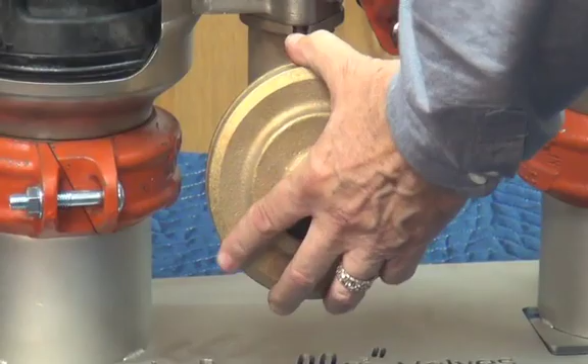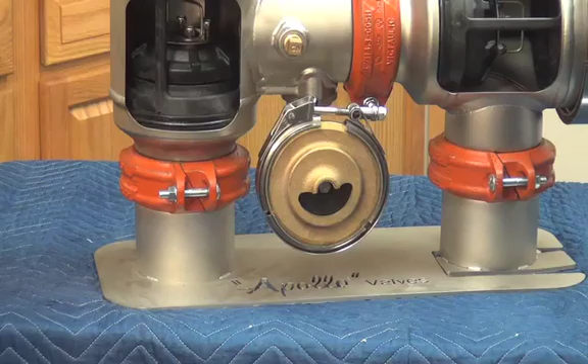Now here's our relief valve cover, which goes on next. Allows us to get our clamp around it, like this. Now we're going to mount our clamp from the top here like this, catching our bolt head just like that. Once we have it in place, now we get our half-inch deep socket, tighten the clamp.

Again, the cover is sealed by the O-ring on the diaphragm. It's not by the torque on that clamp. It just has to be tightened enough. You don't want to over-tighten that clamp because it does place excessive forces on that cover, which can warp things.

So this is our 4A200 series. This is the N pattern configuration where we have the ability to rotate that second check 180 degrees if we want it to go straight up. Relief valve mounted underneath. The horizontal version, like this, sitting back here so that we can see what the horizontal one looks like. The relief valve would normally be mounted on the bottom.

4A200 series, 2.5 through 8 stainless steel body, like you see here. 8 through 10 and 12 inch will be a ductile iron body, fused epoxy coated.

The next model in the Conbraco 4A series is the 500 series, which is their pressure vacuum breaker. You may utilize the 4A500 designation, or it may be the PVB4A designation. Again, both are interchangeable, both of the models used by Conbraco. They also use the Apollo as a model name for this particular model also. So it might be Conbraco Apollo, might be 4A500, or might be PVB4A series.

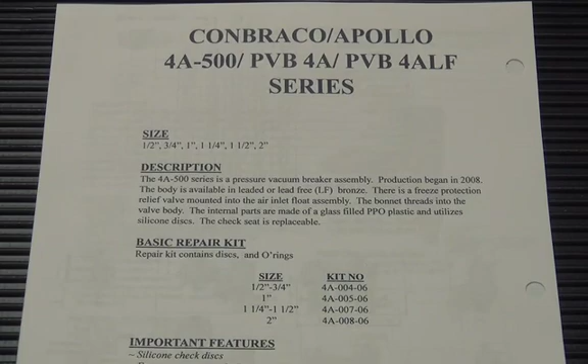They also have a lead-free version in sizes 3/4 and 1 inch. The other sizes of the leaded bronze go from 1/2 inch to 2 inch.

Ball valves, inlet and outlet, test cocks are mounted on the ball valve, not on the body, which if you have to replace shutoffs sometime in the future, you have to make sure you have a tapped ball valve for that location, because that's where your test cocks will be located.

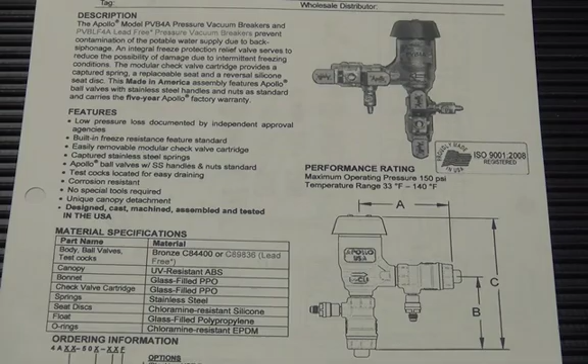The check assembly is modular. This is what the check module looks like inside the body. Here's a set, comes apart. There's our seat. I'm going to start at the top. There's our spring retainer, our spring, our disc holder, our disc retainer washer, our disc retainer bolt, and our check seat.

This check mechanism is the same check that's used in the small 4A and 4A100 and 200 series double checks and RP. Obviously, the spring load is different from the RP version, but the same load as it appears in the double checks is used in the pressure vacuum breaker, so it makes the parts interchangeable.

The air inlet portion sits on the top, and in the poppet assembly right here, there is a small relief valve mounted in there for freeze protection. So if the assembly is installed in an area where freezing happens and it doesn't get winterized properly, or in time I should say, there is a relief valve which may open up and alleviate any excessive pressures in a freeze environment. So this is the 4A500 PVB series.

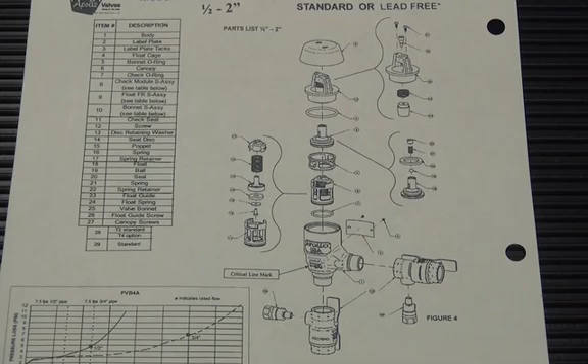Let's take a look and see what it looks like inside.

This is a 1-inch version of the 4A 500 series. It comes in half-inch through 2-inch sizes with a leaded bronze body, and is also available in 3/4 and 1-inch in a lead-free bronze body.

Inlet ball valve, outlet ball valve. On each of the ball valves are the locations of the test cocks for the assembly. Notice there are no test cocks on the body itself, only on the ball valve. So if you have to replace the shutoffs, you must make sure you have a tapped ball valve for the location of the test cocks. If you put a standard ball valve on there, there's no way to test the assembly.

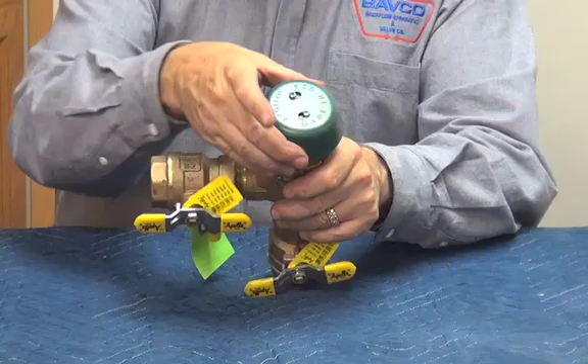The canopy has 2 screws on the top. Loosening those 2 screws allows you to rotate the cover so it comes off. This little piece comes off like this so you can leave the screws on top and it just comes off from the top. Once that has happened, now we want to remove our bonnet assembly.

It threads on and is sealed by an O-ring. You want to be very careful when removing this bonnet assembly because it is plastic, and if you use brute force and try to move it like this, you risk cracking it. So be very gentle, just a small tapping action until you feel it loosen. Once you feel the O-ring loosen, it'll pop off very easily.

The bonnet assembly comes off here, sealed by an O-ring. Underneath our bonnet is a poppet assembly with our poppet disc. We also see underneath a small spacer. The spacer holds that poppet assembly inside the body. So removing the poppet and spacer, the check assembly is underneath.

Just like with our 4A 100 and 200 series, the check is modular. It looks like this—it's the same check used in the double checks and the second check of an RP. When you look inside, you see the spring retainer. I'll show the larger one because it's easier to see. By rotating that spring retainer 90 degrees, the spring comes out and the disc holder comes out in one piece. The seat can stay in the body for the average repair—it's sealed by an O-ring on the back side. You don't necessarily have to pull that check assembly out unless you're replacing that seat.

One screw holds the disc into the disc holder. Make sure the spring is mounted in the center of the disc holder—there's a small lip that it sits in. You want to make sure it's not off to the side; you want it right in the very center.

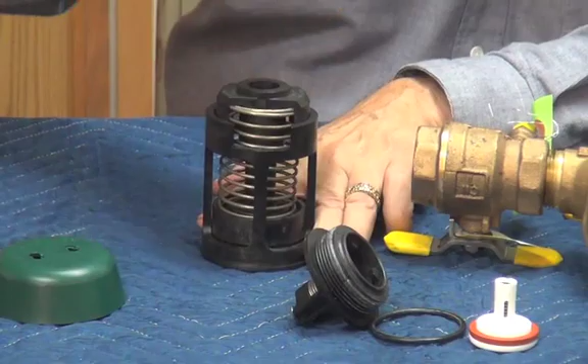The key thing with this check mechanism is that when you put the retainer back together, it rotates 90 degrees like this. You want to make sure it clicks—there'll be a clicking sound when the check assembly is in correctly. Notice how it pops up almost a quarter inch at that point. It can look like it's in, but if it's not turned that little extra to engage the lip, and it pops up about a quarter inch like that, the check assembly isn't going to work properly—it will restrict flow through there.

So whether you take the check assembly and leave the check seat in the body, which is advisable, or take the whole check assembly out and work outside, that's also an option. Reassembly is the reverse. Once I have the check in, the spacer just goes on top.

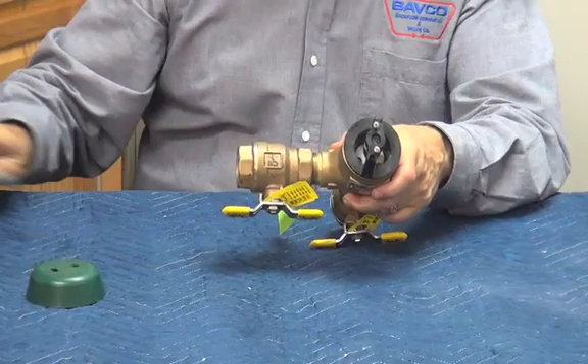My poppet assembly, my air inlet disc, sits on here. When you buy the poppet assembly, it already comes assembled. My O-ring has to be properly lubricated—meaning I put it on my fingers, wipe it 360 degrees around, then put it on my bonnet. Now I can attach my bonnet on top, engage the threads. Once it's tightened, because it's an O-ring seal, it does not require over-torquing. Just literally that small little snapping action is all the tension it takes to make sure the O-ring is properly loaded.

For the cover, you line up the 2 screws from the top like that, rotate it, and tighten your screws down.

And that's our 4A 500 series pressure vacuum breaker, available in sizes 1/2 through 2 inch in leaded bronze, and available in 3/4 and 1 inch in lead-free bronze.